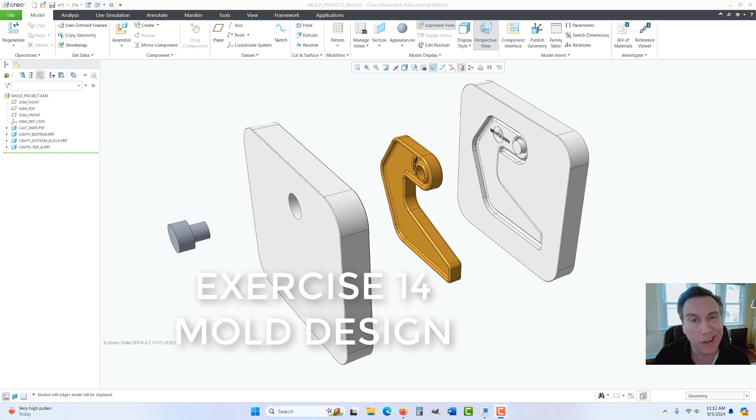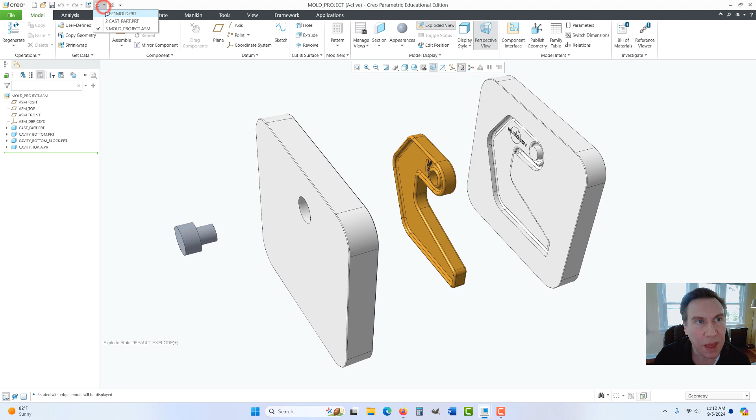Hi, today's exercise we're going to take a look at how to mold a part using the multi-bodied solids inside of a part file. We're going to create what you see up on the screen here, where we actually have two halves of a simple mold, and we'll also make an insert. We'll start off with this part that's already built for us, and you should be able to find the part in the link below if you want to download it. I'm going to go ahead and open that part and start.

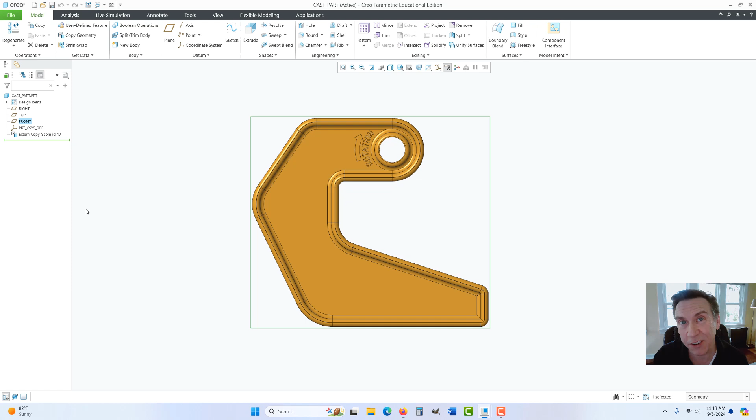So what we're going to do is create a mold around this. To begin, select in this case the front plane. The front plane just so happens to be the parting line. It's dead center inside the actual geometry. If you rotate, you can see it's right inside there. So we could just go right to extrude, and we're going to draw a rectangle to surround this.

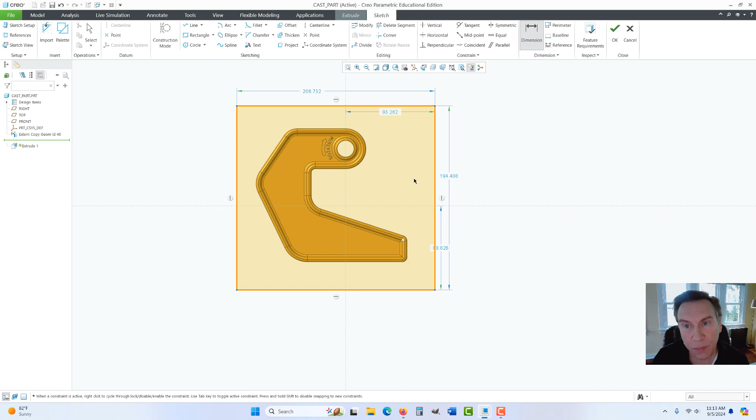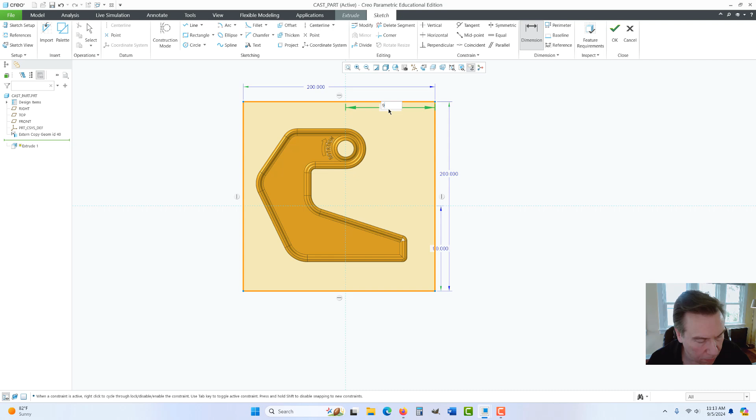And we could put in some dimensions. In this case, we'll make it 200. Double click here, and this will be 200 as well. And then the offset here, we'll make that 90. And this will be 90 as well. All right, we could go ahead and hit OK.

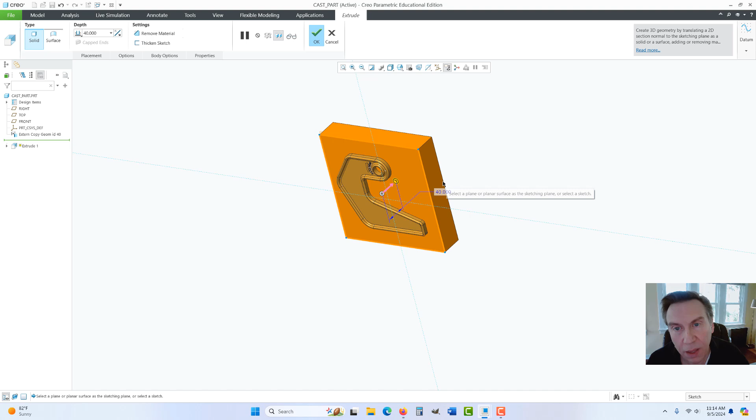Now it's going to try and extrude it. You can see it's on the other half there. Well, let's extrude the backside first. So go ahead and flip that little pink arrow, and you could drag this in, and we'll get this to a thickness of 40. And now you could go ahead and hit OK.

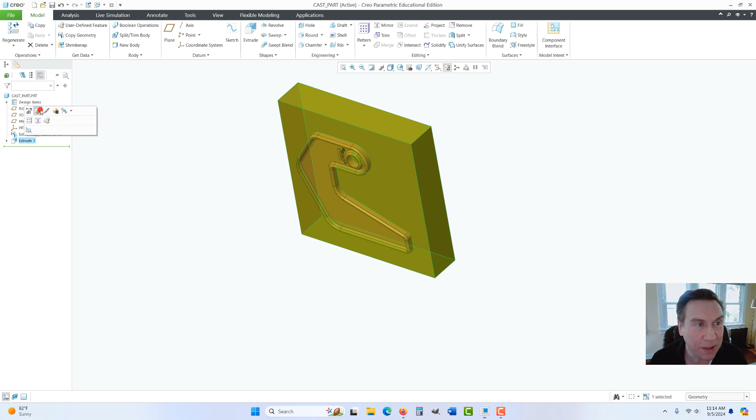We'll also, in this case, this is where I made the mistake by just hitting OK. This is supposed to be a multi-body part, and what you need to do is go ahead and right click on that extrude and edit that, because I forgot to start it off that way. Now the way you do this is you go to body options and hit create new body, and now you could go ahead and hit the green check. Now notice the colors are different because this is a separate body.

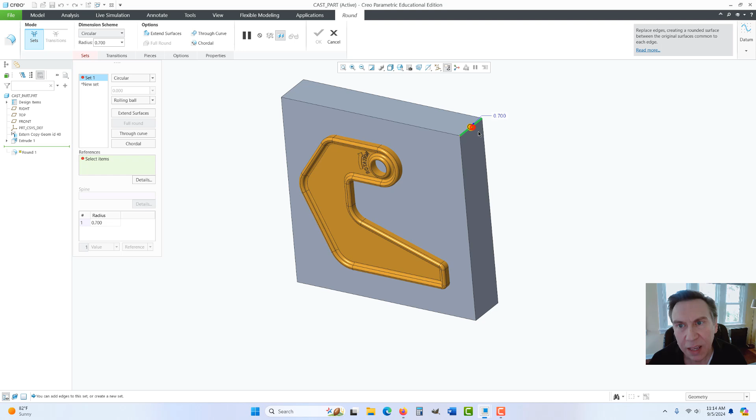So I'm going to put some additional features on here, just some rounds, and let's get them to 0.7. You need to select all 4 corners. Hit OK.

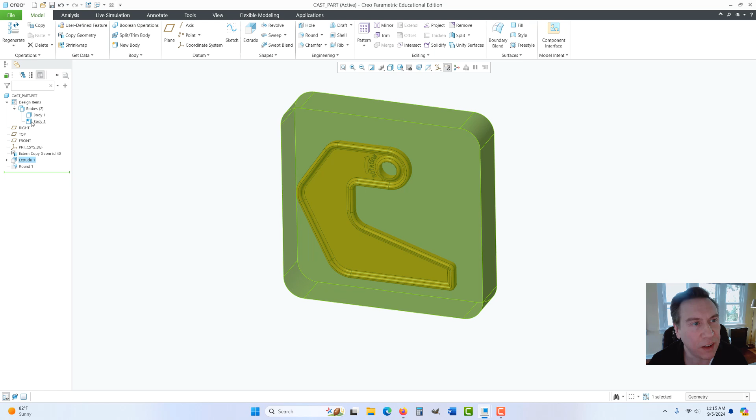All right, so now if you look at this, you could actually right click over here, and if you hit the little arrow to the left of design items, you'll see the 2 bodies. Hit the little arrow into there. You'll see the current star over a body indicates that's the body we're currently editing. Just like in an assembly, you have to edit the part, and they use a little star. It's a green star in assemblies. Here, it's just a little blue star. Now, the body that we're not editing is the actual one that we brought in initially. So we just want to make sure we're editing specific bodies.

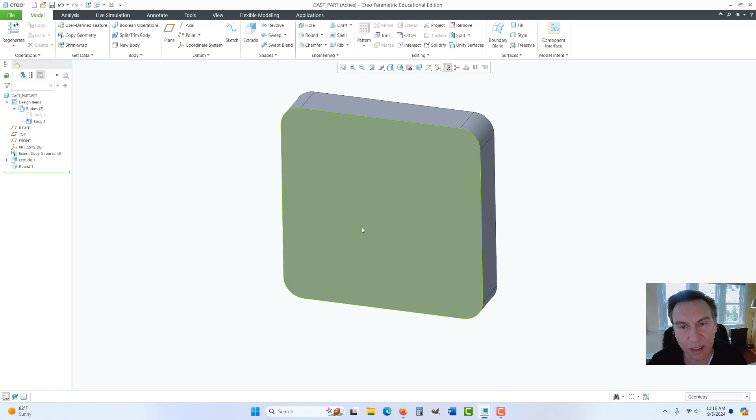Now, I'm just going to hide this body for a moment to show you. I'm going to click on hide, and you can see that there's no cavity yet. So let's click on that and show it again. Now we want to make the cavity.

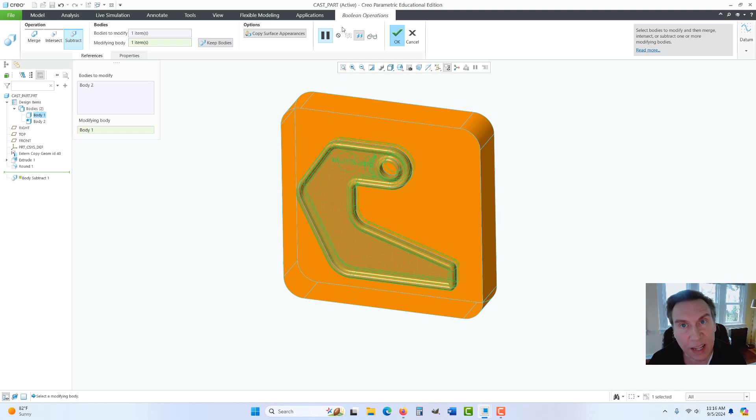So up here you go to, on the model tab, Boolean. The body to modify is the block that we created, and the modifying body is this part, the cast part. Now up here you have the ability to merge, intersect, or subtract. We want to subtract the volume of the cast part from the block. Make sure you select keep bodies so it doesn't delete the modifying body. And go ahead and hit OK.

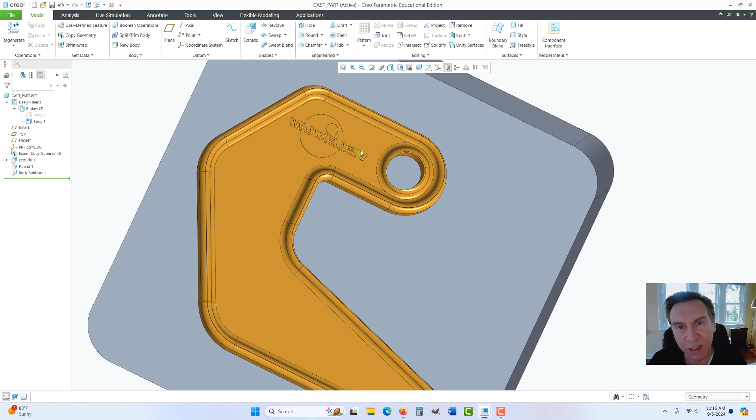And now if we go and hide the body here, body 1, right click and go to the eyeball, you can now see we have the cavity. And you probably didn't notice it has the little logo on the backside, but basically that is how you start off making a cavity. Now let's bring the part back. So right click on it and go to the eyeball.

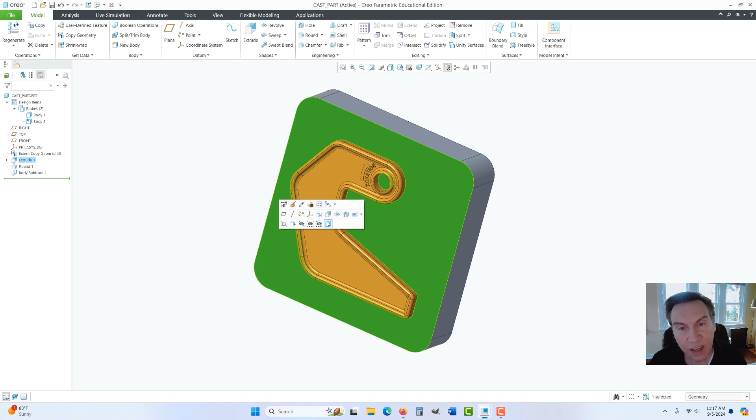Let's build the next part now, the other half. Select this face and go to extrude. What we want to do is copy this, so we don't have to redraw the rectangle.

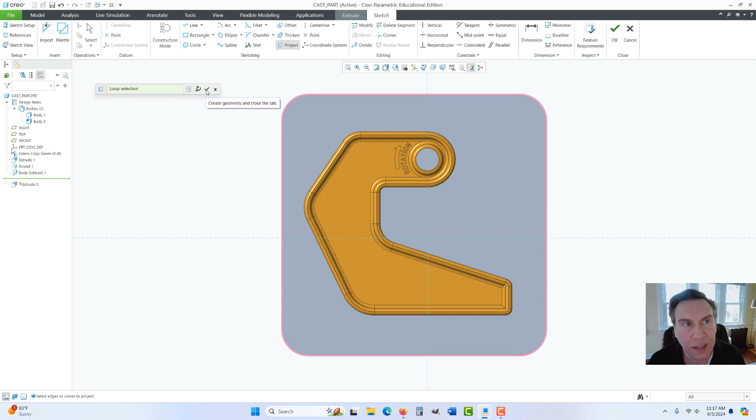So we go to project, and this little tool comes up. If you want to do a loop, just hold the shift key. Select this, then hold shift and select the face, and it will grab everything on the outside. Then hit the green check mark, and it should have generated what you see here. Now we could hit OK, and it's going to create our next block.

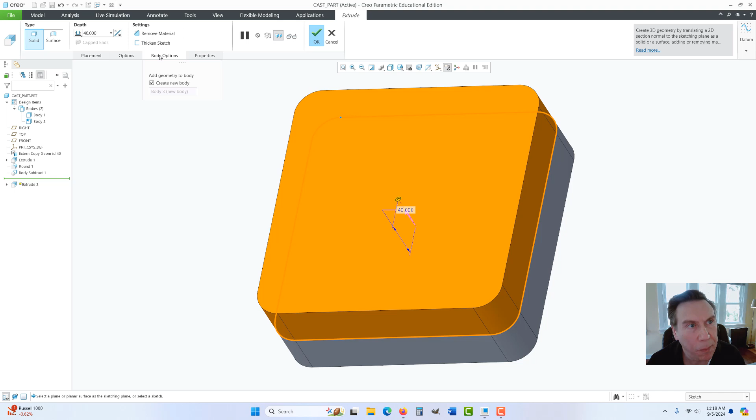Again, we'll go with 40, and make sure that under body options, you create a new body, and go ahead and hit OK.

So now we have the second half. We could hide the rear part. So this body 2 here, you could right click and click on the hide button. And if you rotate it, we can now see our part on the other half.

So we need to make the cavity again. Go to the Boolean operations, and the body to modify is this part here, the block, and the selected modifying body is the brass colored part. Select that, and again, we want to keep bodies.

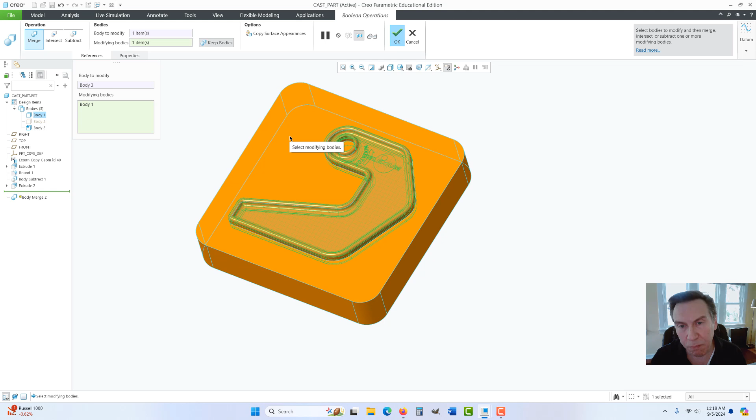Now here's the thing, you could copy surface appearances or not. If you turn that off, it won't bring in that yellowish or orange color into it. We'll try that this time so you can see what it looks like. Oh, and make sure you hit subtract over here.

Hit OK. And now if we hide body 1 here, click on it, you can now see the part, or I should say the cavity with the text engraved and everything on there.

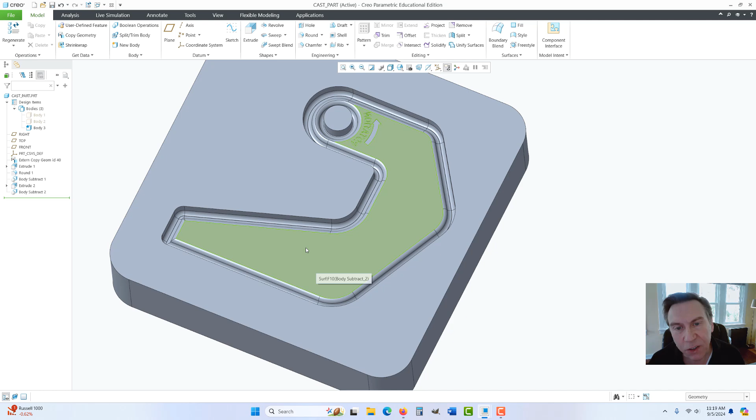And if we bring back all the bodies just by right-clicking and show, we can now see that we have our mold.

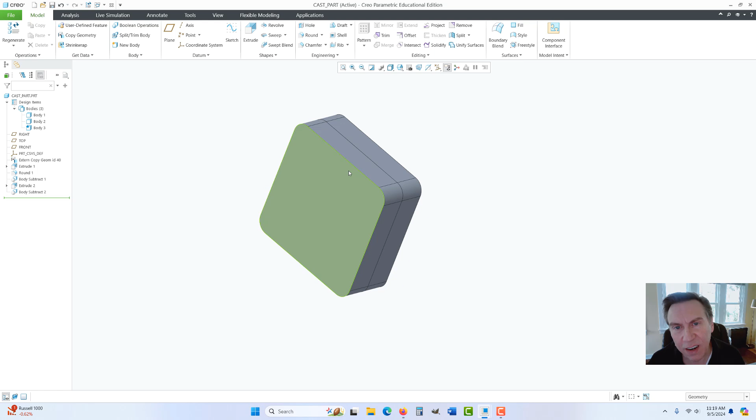Now we want to create an actual pin, a core pin that sticks in there. So first of all, if we go over here to hidden lines, we could see the inside of it, and this is the core pin.

We're going to just do it on one side. You could replicate it on the other side, but let's say we want that to be able to slide out, and that's going to be machined differently. It's very high precision. So what we first have to decide is which side do we want to put it on.

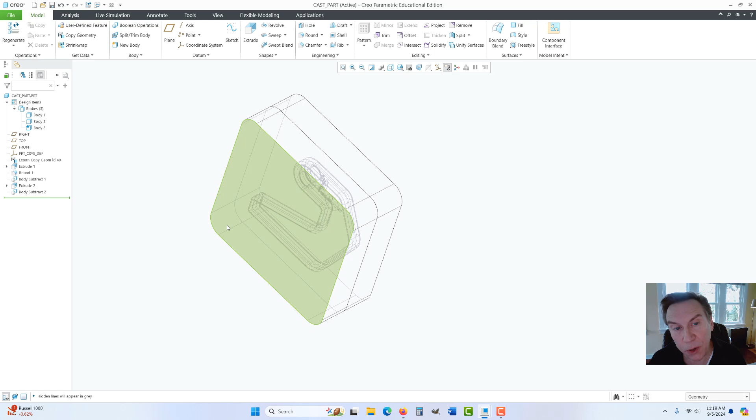And currently, as we hover over this, we see we're editing body 3. We can see the star there. So that's the body we'll go ahead and create that on.

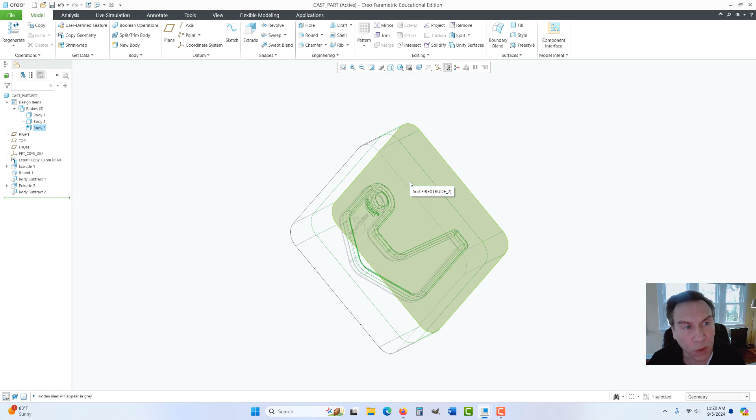So we'll flip this around so we can see that back face. Make sure you see the green edges and that your surface you're about to select is the proper one. So we're editing that. We could select this face, go to extrude.

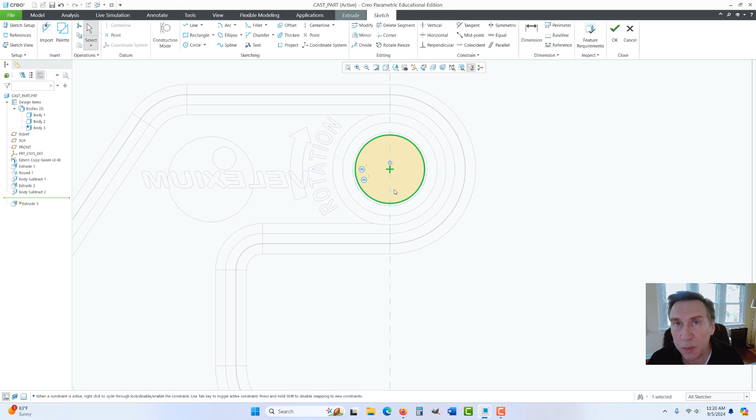And I'm going to go with the circle tool and hover over here. And if you hold or just hover your pointer over the edge, don't click, it will wake up that center point. Now here I'm going to go ahead and click and drag this out to that diameter and click to match it, and you see the equal symbol so it stays the same size.

And now we could go ahead and extrude that, so we could hit OK. It's going to flip it the other direction, so we just have to hit the pink arrow that's pointing in there. Stay away from this one.

That will cut everything on the outside if you flip that one. We want it to cut what's inside. And actually in this case, we have the ability to remove material or add material. So in this case, we're going to remove material—I'm sorry, no, actually we're going to add material to begin with.

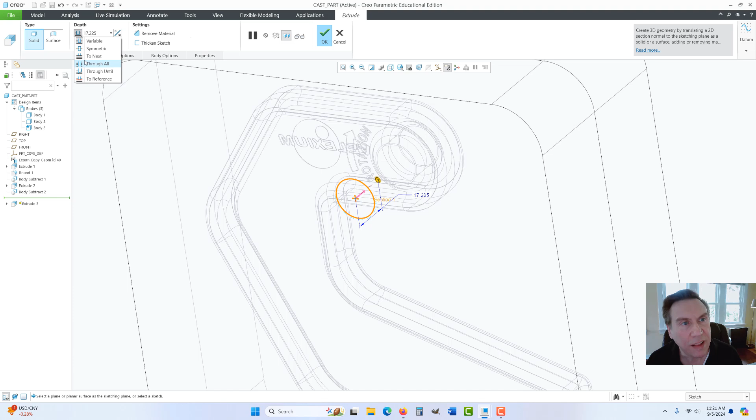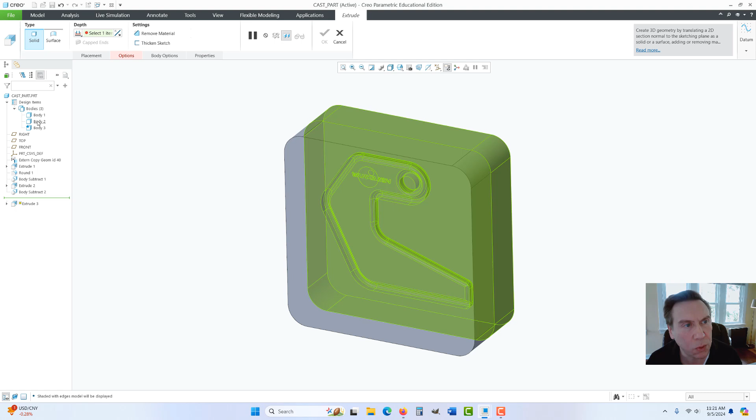And we're going to tell it to go up to a specific edge or face here. So instead of this option for variable, let's go to reference. I'm going to go over here to shaded with edges, and I want to hide—see if we could hide that body too. Okay, excellent, I was just able to right click on it.

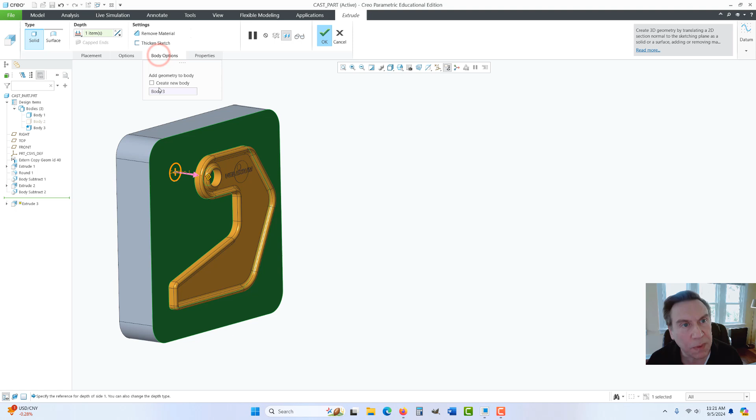And we want it to go up to this surface right here. The best way to select it was just like that. It looks like you could select this because they are the same surface technically, and that's where it will go up to. Now, again, body options, make sure you don't create a new body and hit OK.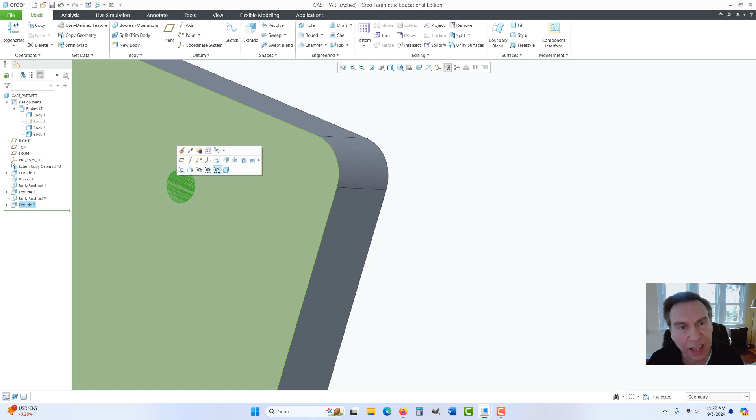All right, so we have a pin in there and it's intersecting the geometry, so there are two separate parts. What we're going to do is build a shoulder on it so it doesn't pop all the way through. We could select this face again, go to extrude, and currently see body 4.

We could actually rename this by clicking once, waiting a second, clicking a second time, and we'll call this core_pin_1.

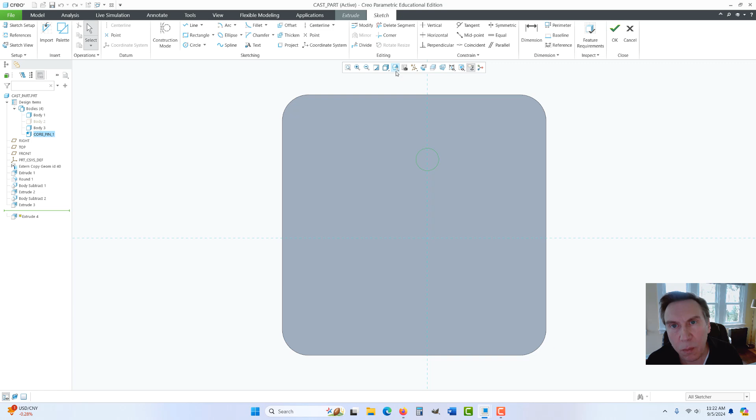So we know that's the core pin. Now we have started our sketch. We could go to the circle tool again and hover over that edge, find the center point, drag out the circle. Make sure you don't snap it to anything, let it flow, even if you have to drag it way out here away from the model, let it not accidentally snap.

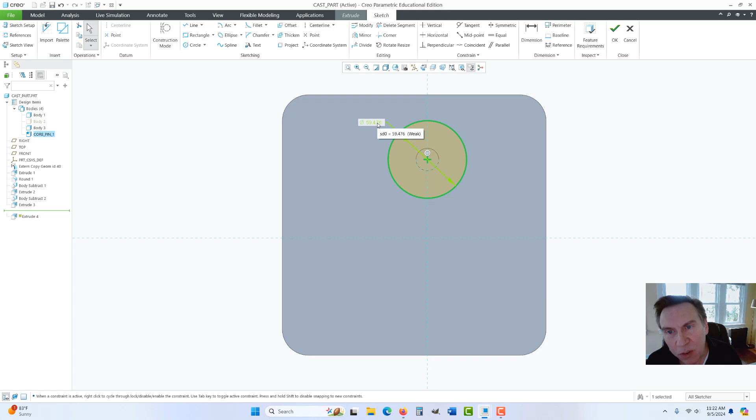Then middle click, and we'll just go ahead and make that, let's see, 30. Oops, I'm sorry, plugging in the wrong thing. Go ahead and make that 30. I actually hit 3, didn't realize it. Okay, and it's a rather big sleeve.

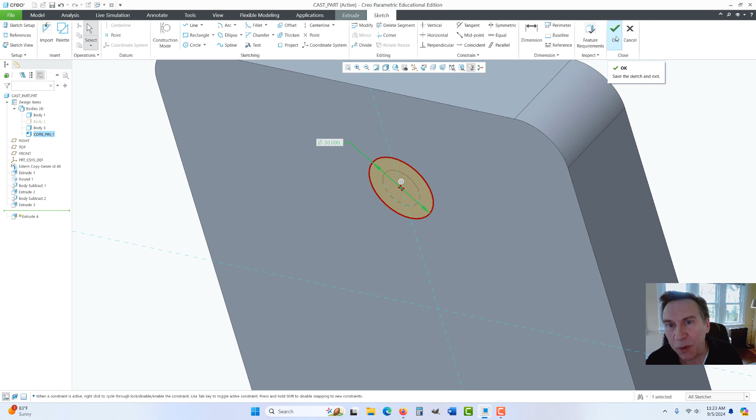We don't need our shoulder that big normally, but we'll just leave it for the lesson. We could hit OK. And we're going to shorten this to, let's go ahead and just make it 10.

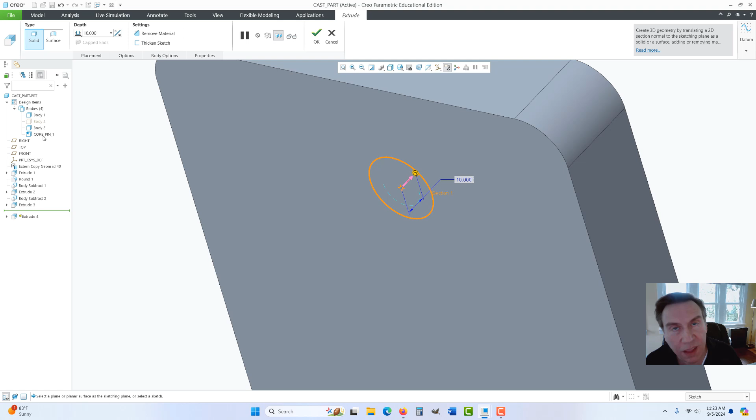Then hit the pink arrow. And enter. Then hit the pink arrow to flip it to the inside. This time we want it to be on the same body, the core pin that we're editing, so it's going to merge with it. You do not want to select the body options on that one. Now hit OK. All right, so here we have this.

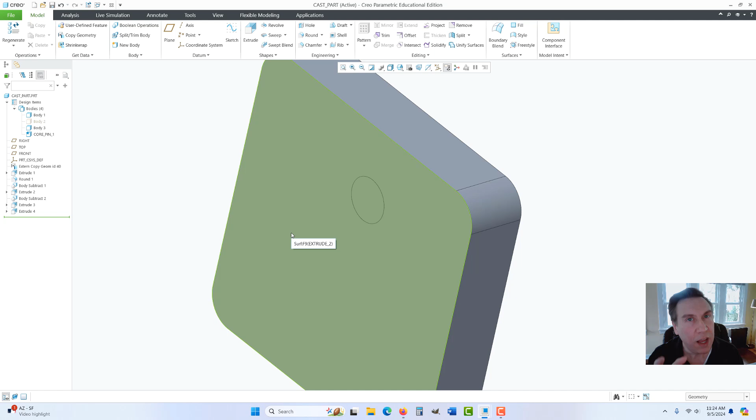Now we could go and just do subtraction under Boolean and remove the volume of that part from this. Or in real life, you do have to have some clearance in there. Just for the sake of this exercise, just to make it quick, let's go - we won't add some clearance.

First of all, we have to make sure we're editing the proper part, and right now we're editing the core pin. The core pin's done, so we need to actually edit body 3 here. Let's click on that body 3 text once, wait a second, click a second time, and we'll call that the cavity_rear.

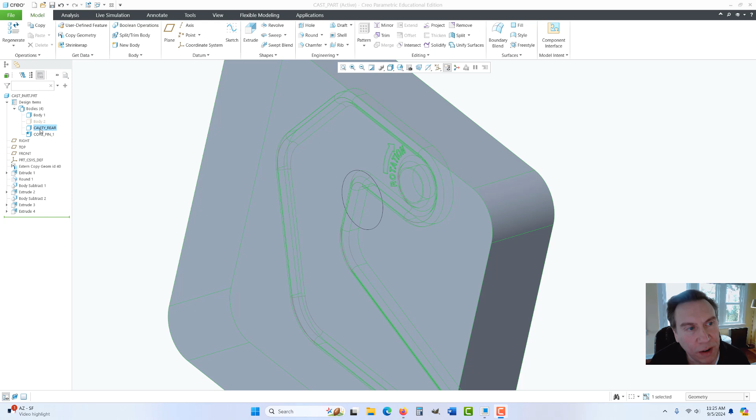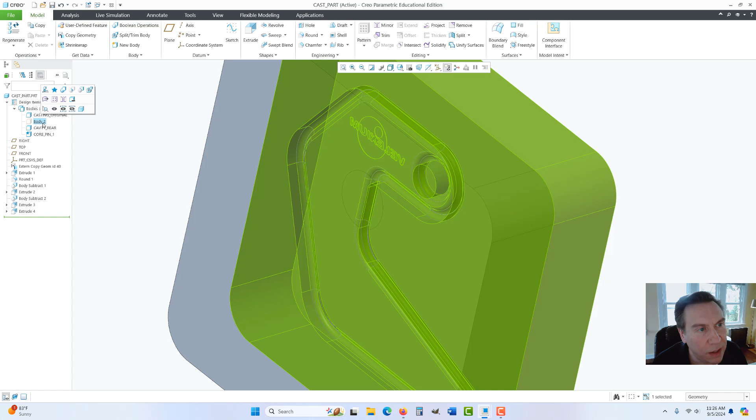All right, so we want to make sure we're editing the cavity rear after we've changed that. Oh, we could change this text too. Click once on that body 1, wait a second, click a second time, and this is the casting, the original part. I'll actually put 'original' on there. Okay, and we could even edit this one, and that'll be the cavity_front.

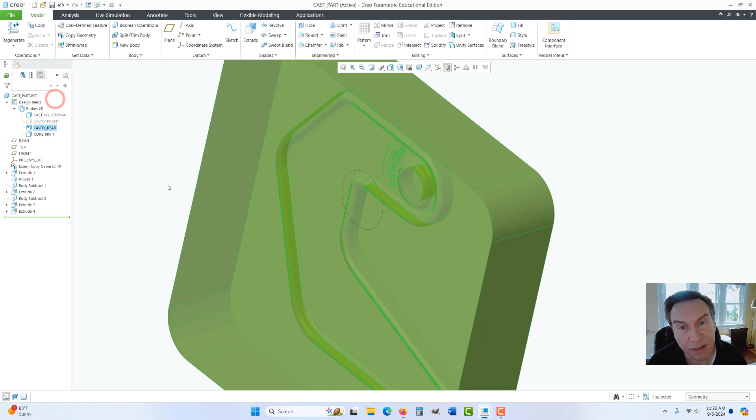All right, so we've named the parts, or I should say the volumes. Now this is the one we want to edit. So you click on cavity rear and select the star, set as default body. That enables us, whatever changes we make, it's going to edit that.

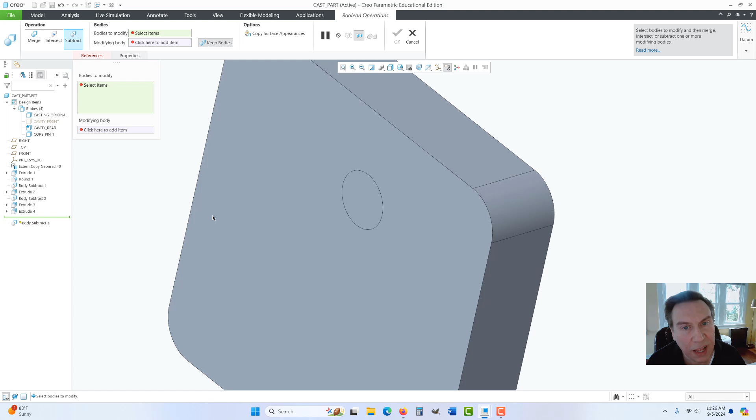So what I'm going to do in this case, we will remove the material, then we could add an offset cut - it'll actually be easier because we'll be able to see it better. So I'm going to go to Boolean operation and go to subtract, keep bodies, turn off that copy surface and appearance. So the body to modify is this block, the cavity rear. The modifying part is the core pin. Make sure we have everything selected and hit OK.

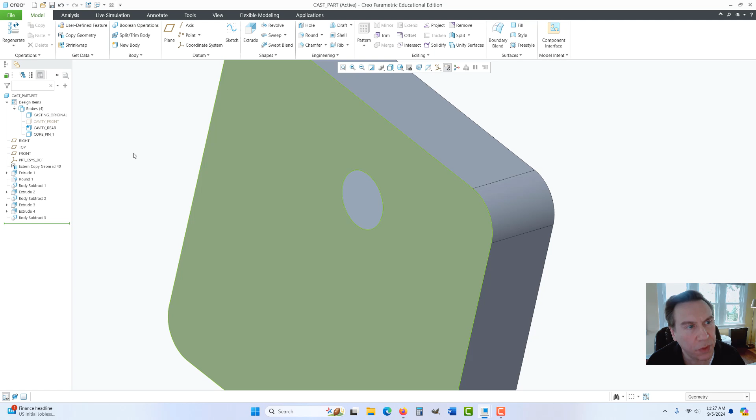All right. Now, if we hide this part, which is the core pin, just by right-clicking, click on there, we can see we have a perfect hole now that would fit into. But being steel or metals, you can't squeeze that in there without a major press fit, or you're going to have to freeze it or do something, and we don't want that. It's supposed to be a removable cavity.

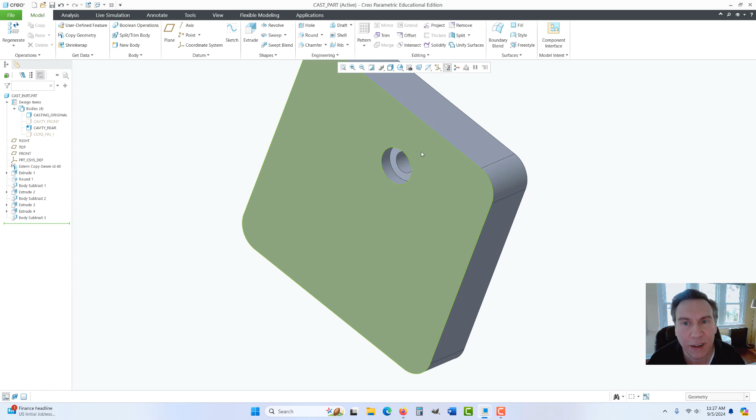So we're going to put a little clearance. And you can do this in any way you want - this is just one technique. I'm going to go ahead and select this face, and I'm going to go to extrude.

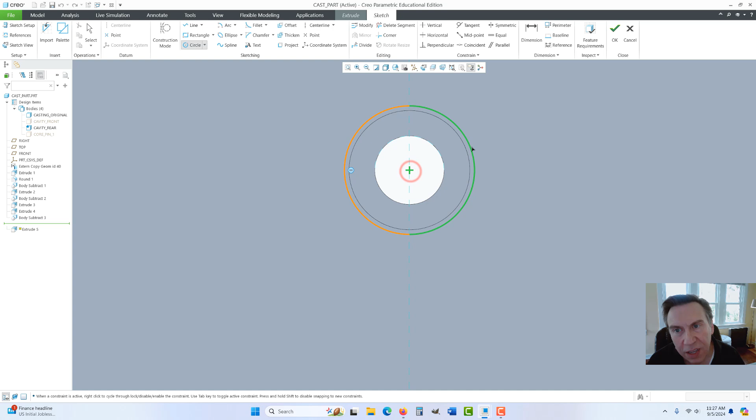And we could put in another diameter here. We could just find that edge, make it a little bit larger. Don't let it snap to anything unless you want it to, but we don't want equal or anything like that. So let's bring it out a bit.

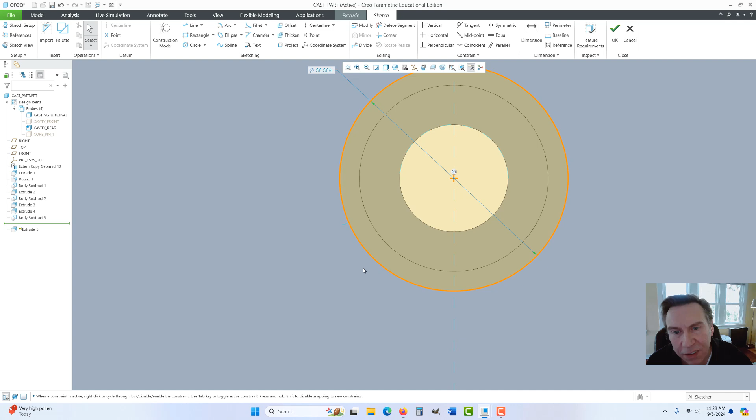And now we could middle click. I snapped to something, so that constraint to a point, I didn't realize. I'm going to have to click on it and hit delete. And now it's floating and we see the dimension. So if you don't see the dimension, you accidentally locked into something and you just have to find that little circle for that relation, click on it one time and hit delete.

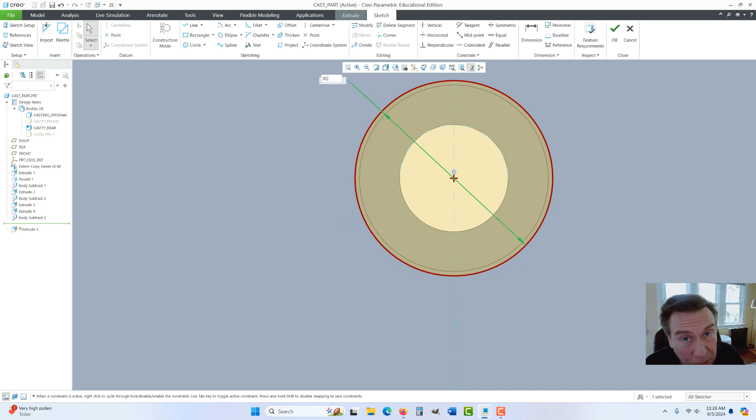All right, so we know this diameter I think was 30, so we'll go with 30. And it depends on how much play you want on here, but I'll do 0.01, so put 10 thousandths. And now we could just go to OK. And we select remove material and hit OK. And we would do the same with this one too.

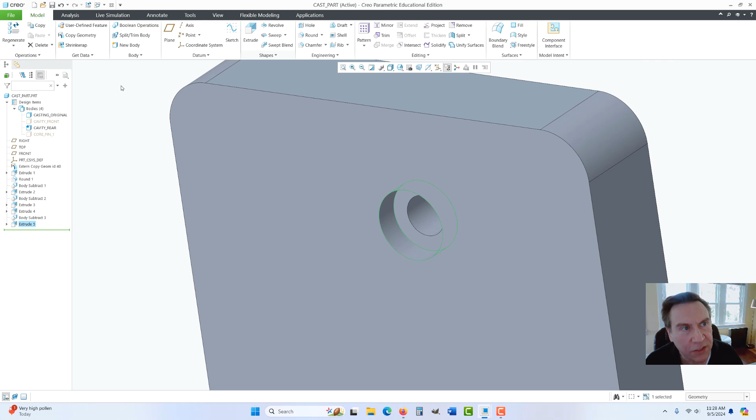But let's go ahead and bring back the core pin. So click on it, hit show. And we could show this one. And now let's go ahead and we will, let's just center this.

Explode it. Now, to explode it, my understanding, we have to bring it into an assembly, and that's what I'm going to show you how to do. So this is an extra step, which in other systems, actually, it does it inside here, and I'm not sure if I just haven't found that yet.

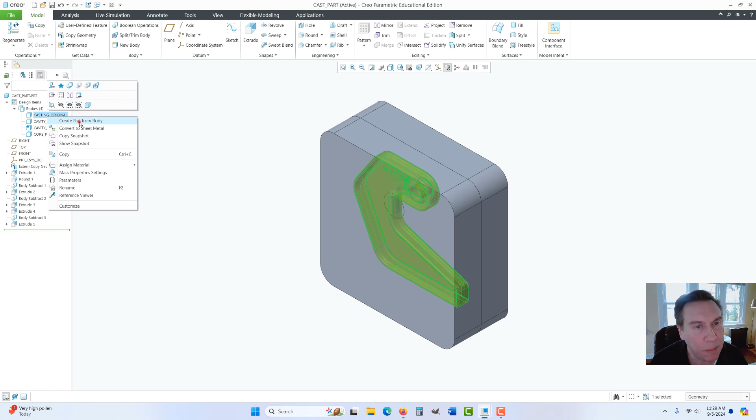It might be there, so if someone knows, correct me below. But here's what you could do. You start by right-clicking on like the original casting, and you could create part from body. And in this case, we'll call it casting renew. I'm just making that name up just so we know it's not the original.

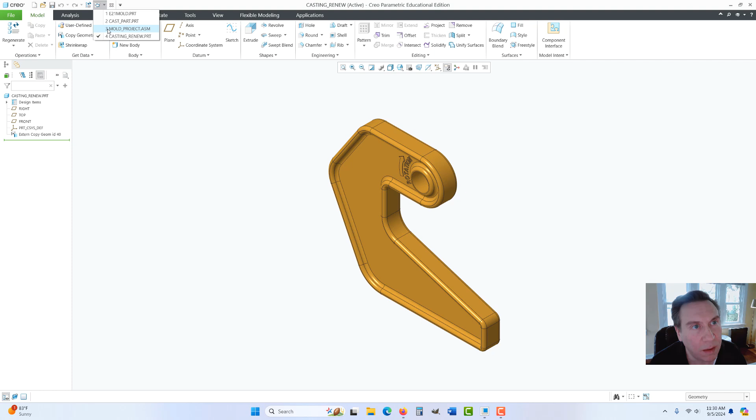Okay, and then we could go back to what we're working on. Oops. There we go, which is the cast part. And then we go ahead and do the next one, the cavity front. And so we select that, create part from body.

Theoretically, you could probably in multiple CAM systems bring this in or export it. And you could do this in those CAM systems technically. Like if you're just trying to cut out a cavity or reverse, maybe make an electrode, that might be something. But anyway, I'm going to call it cavity front underscore B.

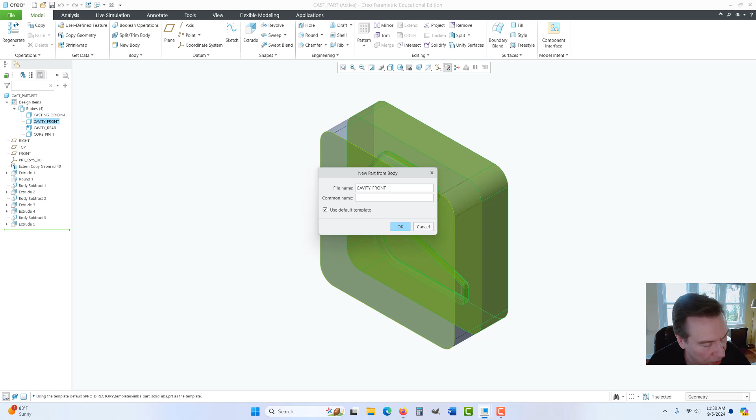There's that. Go back to the cast part. And then the rear cavity. Cavity underscore rear underscore B.

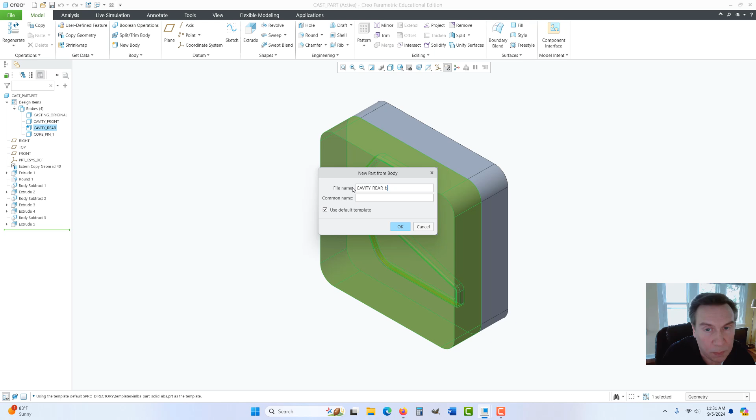Okay, go back to the cast part. And finally, the core pin. Right click, create part from body. B.

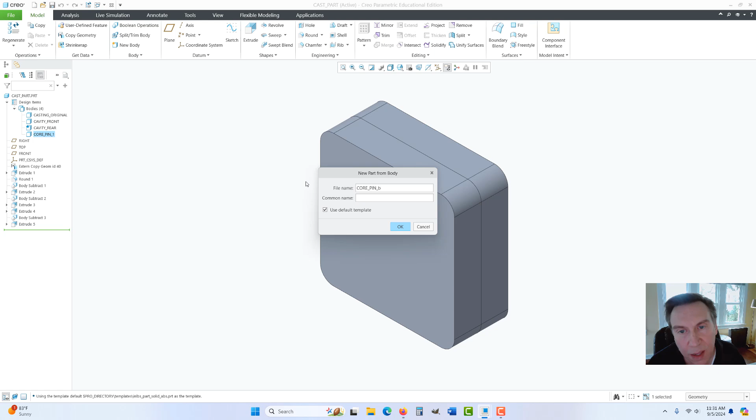Okay, we're going to go ahead and start a new assembly. And we'll call it E14 mold.

And now we could just go to assemble, go to in session, and we could find those. Now I have a lot because I made it twice already because I showed you earlier. And I labeled them all B. So cavity front B, hit open.

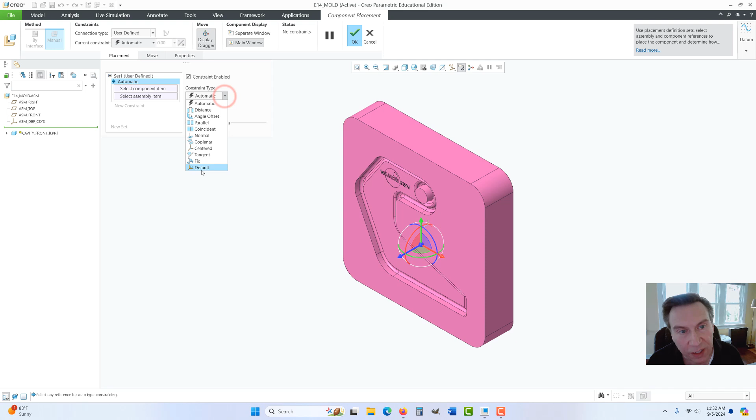And what you do here is you just select default and it drops it in its position related to the origin where it originated from. So if you just hit default every time, it should reassemble itself.

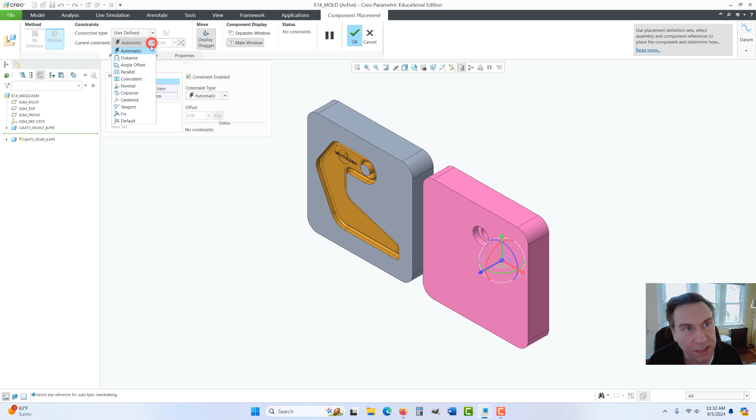And so we'll go ahead and again in session, and we want the rear. And watch this as we select default, goes right in place. Let's do the next one.

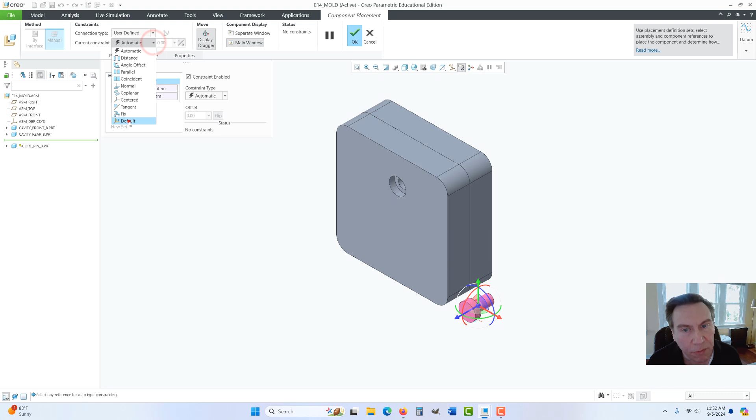And you could select either here or here, but don't go with automatic. Make sure you select default, hit OK. Now we could explode that.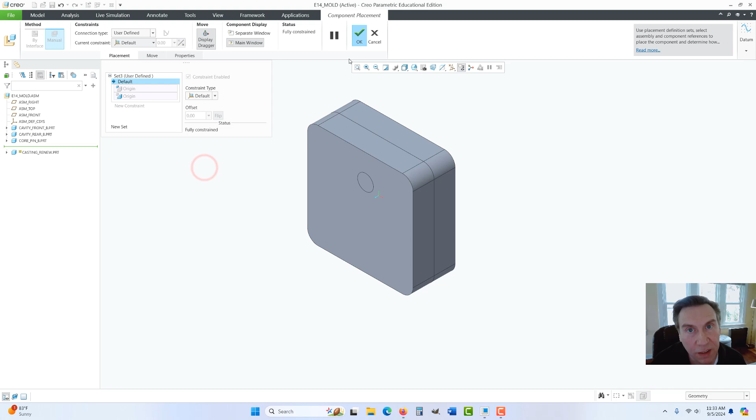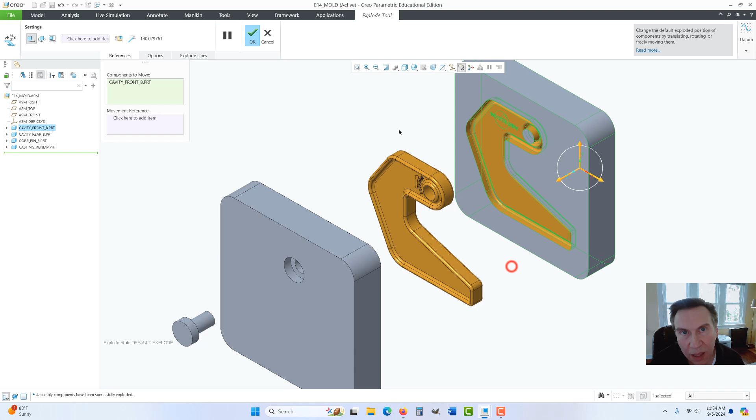Go to Edit Position, select this model, grab the Z arrow, drag it away. Select this model, grab the Z arrow, drag it even further out this way. Click on this part, grab the Z arrow, drag it backwards, and hit OK. And there we have it.

And that is how you could create a mold, a multi-bodied mold. You might not have to do this last step. Probably where I would have done that when I worked in mold making. We always used to make assemblies, but part files, I'm sure there's ways you could bring that into your CAM system without having to go this extra step. But if you want to explode it, as far as I could tell, that's how you do it.